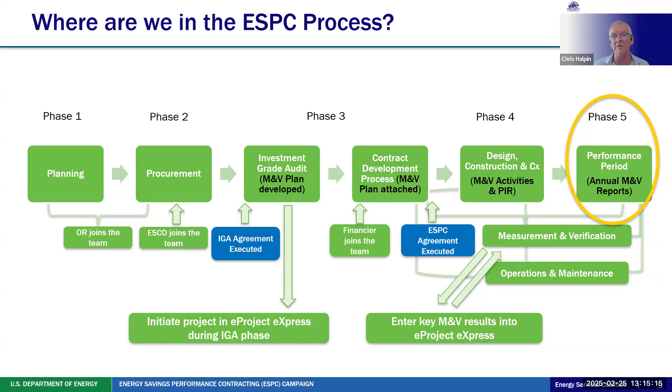Most of what we've talked about with M&V has already been covered in previous trainings and workshops. We're going to focus on this phase 5 performance period, but first a high-level review of the M&V process. The first time we talked about this in detail was in our workshop in October of 2024, reviewing investment grade audits, selecting M&V methods, determining key performance indicators, scheduling M&V activities, and the commissioning plan and activities.

One thing we went over in detail, commissioning and M&V are linked. Commissioning is making sure the equipment being put in is run through its paces and operating properly, the way it was intended. M&V is the energy savings that result from that equipment running properly and being maintained the way it was intended.

Owners reps, which you've heard me refer to multiple times - this is what I used to do for a living - can really help you out in these cases because this is a real specialty. M&V is one of these niches, and even if you have a really good facilities team operating your facilities, most of them have no background in M&V. So it's good to get some extra outside help for this.

This is a slide from Department of Energy's Performance Contracting National Resource Center, or PCNRC, Training Certificate Series. This is an 8-module series developed over the past few years. I was lucky enough to help them develop this, doing some quality assurance audit work for Department of Energy on it.

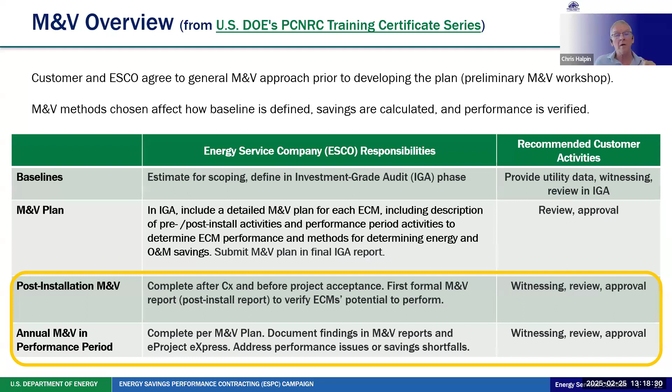So the first type of M&V report is the commissioning report. This is closely related - it's verifying the equipment, and these functional performance tests are there to make sure that how these things were designed is met during construction and implementation.

Then there's this post-installation, what we call the year 0 M&V report. It's right before acceptance. This is the last point we really have leverage with the ESCO to make sure this stuff is actually working and hopefully going to be delivering the savings to you. It's the last chance you have to really make sure these things are working well before it gets into the performance period.

Then the annual M&V report, and this is something done according to the contract. When you get this contract developed, the annual M&V report is described in detail in the M&V plan. There should be a template in that contract that shows how the ESCO needs to develop that report and how you should be reviewing it.

The first step that happens when an ESCO does this report is really verifying the savings were achieved. First, verifying that the equipment was installed the way it was supposed to. Then seeing if it's being operated and maintained the way it was supposed to. So if your folks on the owner side are supposed to be maintaining this equipment, the ESCO makes sure everybody's on the same page with that.

There are 4 different methods in the IPMVP. Two of them are based on retrofit isolation, basically taking lighting and motors. Because you can isolate those, you can count the fixtures in a room and go to the panel and actually put a meter on them, or put a meter on the disconnect for your motor and see how much electricity it's using, versus a whole facility. If you put a bunch of different measures in place, you can't just go to the meter and look at that, or individually at the panel. It has to be done as a whole building.

IPMVP gives you 2 ways to do each method. Option A, which we'll talk about in more detail later, is measuring a key parameter or two one time. Option B is all-parameter measurement over time. Whole facility is option C, where they basically take all the utility bills over however many years are in the baseline, and then take your utility bills going forward and use linear regression analysis, basically an algorithm, just like everyone knows about algorithms and AI now. That's been getting done for decades through option C. Option D is very similar, except using an energy simulation model that gets calibrated with the actual utility data over time.

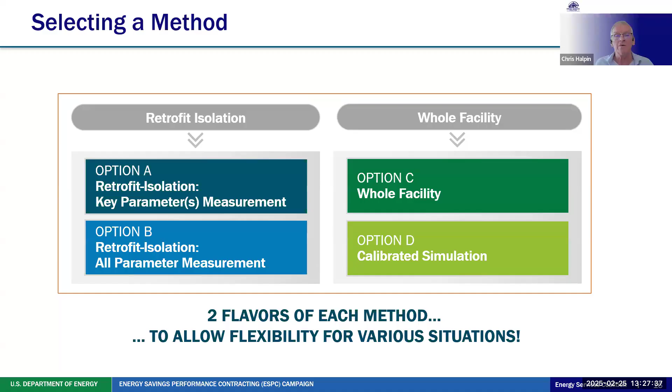So these 4 options each have pros and cons. Option A is used for short or long term. The usage, like hours for example, can be measured or agreed upon. The calculations are typically done in spreadsheets, and the cost is low. I developed a rating for this a while ago using sort of what you see on Yelp for the prices of restaurants, everyone understands it, 1 through 3 or 1 through 4 dollar signs. Typically it's used for lighting, motors, water, whatever.

Option B is where you're doing things like chiller replacements or solar. You're going to put several meters on it and measure it for quite a while, for weeks or months during the IGA, and maybe even permanently over time. Whole facility measurement, like I said, this is option C, where you're going to look at all your utility bills, electricity, power, and so on.

Can everybody hear me okay? Now I'm getting messages that it's choppy. If it's okay, let me know. Chris, your audio kind of slows down and speeds back up. I'm getting everything, but it is a little bit choppy, so just FYI. I don't know what's going on with this internet.

So option C, whole facility measurement, is primarily used in deep retrofits, like if you're doing 10 measures across your building or your whole complex. That's when option C is super, super helpful. It makes it a lot easier than trying to measure a bunch of individual energy conservation measures, or ECMs.

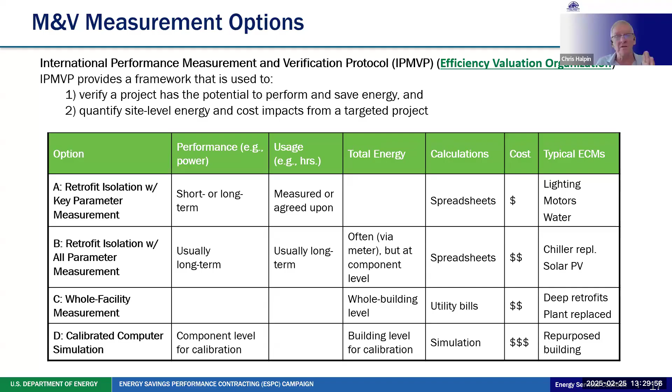If you're going to have a project or a measure inside your project where the savings aren't worth a lot, option A is great. Say you're going to replace water conservation measures, faucets and this and that. It's not a lot of money, and you're not going to spend a lot of money measuring it. Option A is great for that.

Or if the contractor isn't responsible for all the parameters affecting energy consumption, like weather, occupancy, and so on, option A is really good for that too. And if it's something you're able to assume with a level of certainty that's acceptable to everybody involved, option A makes the most sense as well.

And if ongoing measurement isn't required, like lighting is a great example. When you take out a 25-watt compact fluorescent lamp and put in a 10-watt LED, that LED is always going to draw 10 watts regardless of how old it is. The operating hours may vary over time, but if you can agree to them early on—say, this room operates 8 hours a day, 260 days a year, plus or minus 5%—that's close enough. Option A is just fine for that.

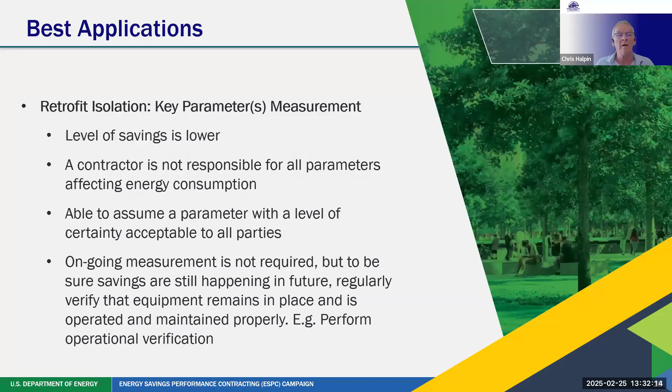But the loads can vary—cool summer, warm winter, cool winter, boiler, and so forth. The ESCO is responsible for the operations and the performance of that equipment. If they've designed and installed a chiller plant, for example, and the chiller has an efficiency rating that varies according to load, you want to measure that and see if it's actually performing as described in the contract, in the services agreement or the ESPC agreement.

Ongoing measurement really helps confirm this remains the case, like with the lighting, but it's even more important with something like a chiller plant or solar panels, and tracking the savings over time—because a lot of this equipment has many moving parts, like a control system or boilers, and depending on how the operation goes, that can really change over time.

I've seen situations with set points on whole systems where there's an event on a Saturday night, and the maintenance guy goes in and changes the schedule, then forgets to change it back. So every Saturday night, the atrium is set to 70 degrees when it could be at 80 degrees because nobody's there all weekend. So you want to make sure it gets corrected over time to keep a near-perfect application. That's why metering gets installed for a lot of this stuff.

So for the whole facility—that's if you're going to do very comprehensive measures saving 20, 30%, I've seen even as high as 40%—if you have a lot of energy conservation measures with potential interactive effects, like changing out the lighting, which reduces your HVAC load, and you put in new cooling systems and new controls, all of this is very difficult to calculate and keep track of without long-term evaluation.

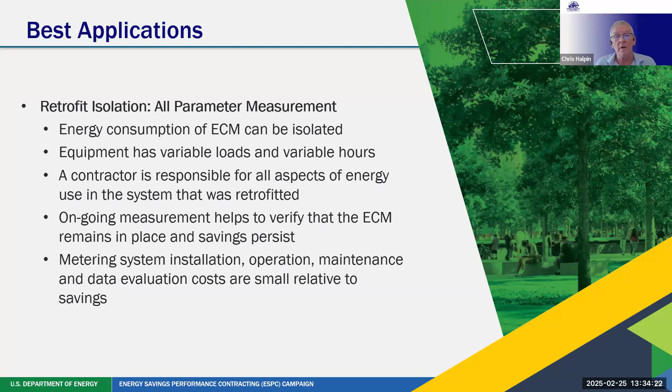Option C is a great way to do that. Also, if you have soft savings—like doing door sweeps and caulking on windows and that sort of thing—it's almost impossible to measure that directly. You just group that with option C and do a linear regression analysis, or have the ESCO do a linear regression analysis for it.

Then option D, like I said, is rarely used. It's an energy model-based option. We use something like a DOE model, Energy Plus, which is software out there. It's helpful for new construction.

And most people don't know, but depending on the state you're in, you can use ESPC for new construction, which is wonderful—you can peel out some of the mechanical and electrical stuff you probably don't have the money to pay for at the higher grade anyway, and performance-contract that piece of the project to fund it, using option D, because you don't have a baseline.

You don't know how much energy is going to be used by that building unless you model it and do a really quality model. And then you can calibrate actual energy data to the fact when it's built.

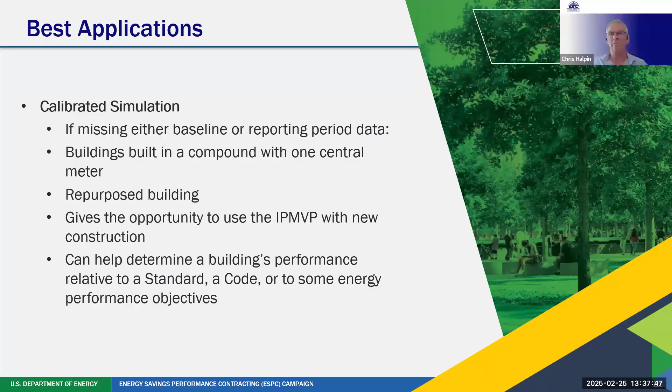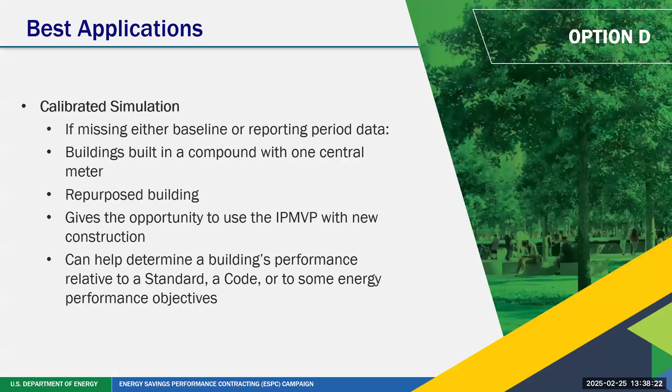Anyways, we used to see stipulated or deemed savings used a lot in industry, but it's really come a long way in the past years, getting used with these options A, B, C, D. Deemed or stipulated savings is not an option here - there's no option E in this protocol. That really just means an agreement that no real M&V is going to get done. It may be fine for minor things, especially for operating savings, but it's usually not a very good idea, especially these days when the technology is here to measure virtually anything that you're doing.

So one of the other best practices is making adjustments to the baseline based on post-retrofit conditions. There's routine ones and non-routine ones. Routine is like weather changes - every year you're going to take a look at the data. How hot was the summer? How did the chiller plant perform during the hot summer? And you reconcile that - it's not showing lots of extra savings, it just ran more, so there's more savings and bills went higher, and so on and so forth.

Non-routine adjustments are for things where something changed in the facility - for whatever reason, the facility got closed for the summer. This sometimes happens with schools, especially during the baseline period - that school was used for summer school, and not used for summer school during the performance period, or vice versa. All of a sudden you see this, and especially in a warm climate, it can make a huge difference.

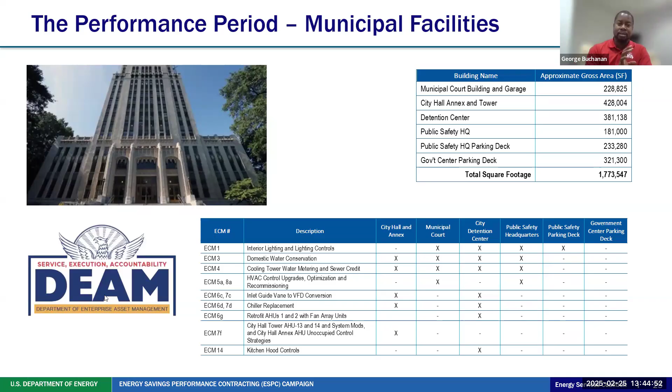As Chris mentioned, contact information will be up there, and of course the slide deck will be shared with attendees. So what I'll talk about now is the city of Atlanta, the capital city here in the Southeast, and I've focused on the large downtown buildings that they put into one of their ESPC portfolio sets of projects.

The reason I've included these—it all scales—is I want to talk about some examples of actual performance period as well as some M&V best practices, which is what we're here talking about this afternoon. So you can see here lots of square footage across these buildings, and along the bottom you see the ECMs that were included.

There are 9 projects here out of 22 discovered and presented by the ESCO, and these are the projects the city went with. You see them here across the matrix—different buildings got different ECMs.

A couple of things going on with this project: one, these are old buildings, they're large buildings. Some are connected and had shared utility meters, so baseline development was really a challenge for the ESCO to isolate what consumption belonged to what building.

Across this list of measures you see this blend. We hear the term low-hanging fruit—I don't think that's a good term, but that's just me. So a combination of those quick-payback, fund-generating measures, some measures that the city just needed to have done to maintain strong operation of the equipment in these buildings, and finally some capital-intensive measures—look at chiller replacements, for example, think of it that way.

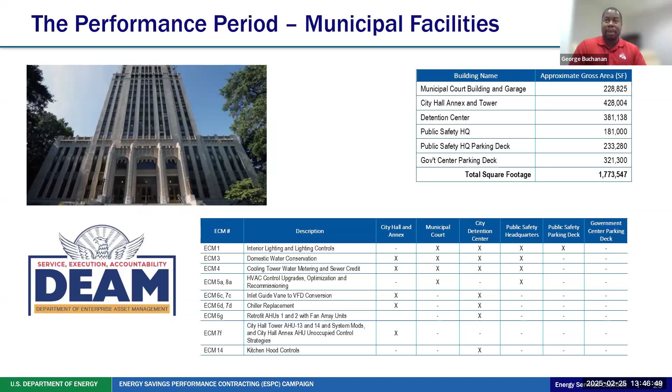So if you go on, here in the construction period, what did we find? We found that the ESCO presented—well, before they presented, you saw Chris was just speaking about IPMVP options.

You see most all of the project was done under option A. You may have situations where there are different M&V approaches done on a per-building basis, but that wasn't the case here. Almost everything was option A. In this case, lighting was the only ECM that was option B, but it was actually option A, right?

Chris was describing option B for us as continuous measurement of parameters over time. Well, the ESCO in this case had some short-term measurements on the burn hours for lighting, but they didn't do much in the construction period in terms of measuring burn hours. So it's really an option A. They label it option B, and it went forward.

So here, option B. The savings during the construction period, as reported by the ESCO, you see in these three tables along the bottom and on the right-hand side. These are your grouped energy conservation measures. You've got your lighting retrofit in the top right, the water conservation project in the bottom right, and of course, cooling tower submetering.

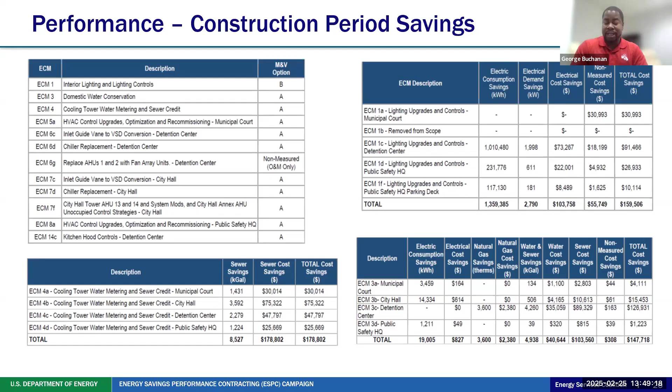Not going too deep into it here, but for example, you see in the bottom right in the water conservation, there is an impact to heating the hot water used in those buildings. So not only do you have water and sewer consumption savings, you're also going to have a gas savings as well. And then lighting, of course, is what it is. Now, again, these are the savings reported by the ESCO during the construction phase or construction period, and you see, taken together, these are some pretty impressive numbers.

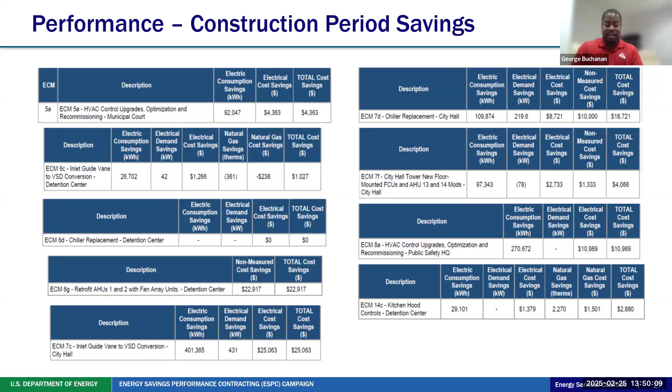Well, we found that we didn't necessarily agree with the reported construction period savings. In fact, we recommend the city recognize about half of what was reported.

So just a quick example, the cooling tower submetering project, right? The water utility says, okay, we'll give you that credit, but you need to prove 12 months of data to show that it's valid. Now, during the construction period, it was 12 months itself, so there weren't 12 months of available data for that reporting. The ESCO is very happy to report those numbers, but there was some verification that needed to happen, and that we were able to find here.

In addition, some of the mechanical measures on the slide with all the decentralized measures - there were ongoing equipment challenges and operating challenges with that equipment that meant savings, of course, weren't being achieved. The equipment's not doing what everybody thinks it's supposed to be doing. So here, just some best practices, on sort of a what-to-avoid concept here.

Just look into your baseline. That is, if you were to separate the investment grade energy audit into phases, for example, you've got your baseline development as that first phase of the IGA. So it's critically important to dig into everything that's being presented. During the guarantee period, where you see inconsistencies in reported use, this is a matter of data clarity - garbage in, garbage out. You need to share information with the ESCO, particularly on the O&M side, where some of the measures weren't performing as they were intended to.

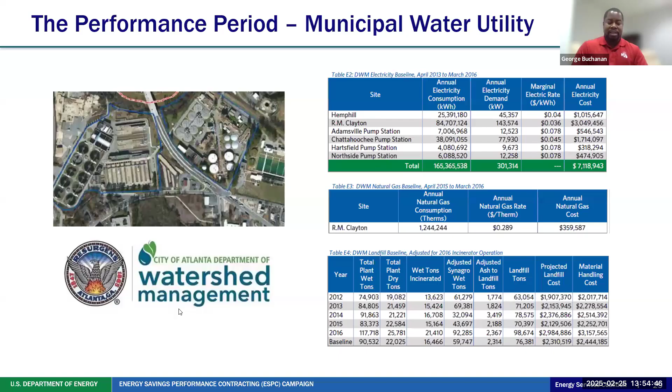Going on to the next slide, after the ECMs were implemented, this involved the installation of a sludge drying plant—you see it there under construction—where now all of this wet tons of sludge is going to be dried and we create these little pellets, dramatically reducing the cost of landfilling the material. This was a pretty big project, about $77 million between the ultraviolet disinfection system and this new sludge drying plant. UV disinfection is just part of the process in wastewater treatment, actually the last step before dumping the effluent back into a local water source or whatnot.

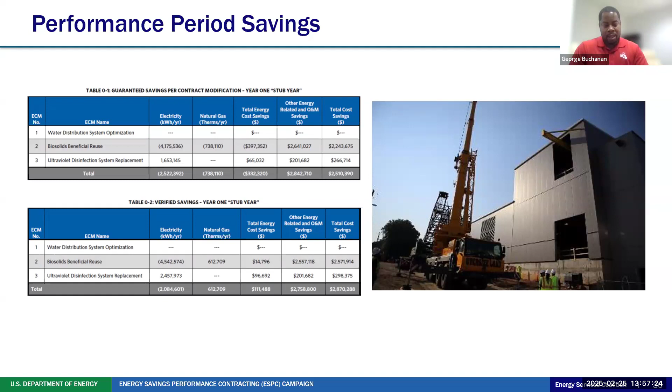So what did we find? The ESCO had to make a lot of assumptions. The UV system—yeah, they were able to calculate savings and it was within reason, but they had to go back to a lot of baseline data because the city wasn't necessarily timely handing over information. So as you are preparing your contract, your project, make sure you've got the means to continuously transmit data, and that it's not going to get lost in the shuffle.

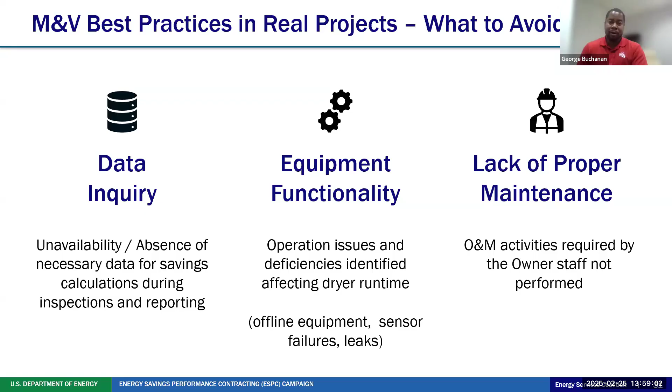On the equipment functionality side, particularly with the sludge drying plant, we saw operational issues and deficiencies. The ESCO creates the condition for you to achieve savings, to operate under this new, more efficient, more beneficial standard practice. It's up to you to maintain the equipment as prescribed, to operate the equipment as prescribed, do your PMs and so on. Here we see lack of proper maintenance, where systems are falling in and out of operation. The way the contracts are written, the ESCO is going to be able to say, look, I've satisfied the conditions of my guarantee—the reason this isn't performing is because you're not doing your part. And that stuff's going to be spelled out in the contract.

Just like I was mentioning, do your part to maintain the equipment. Make sure that any repairs, replacements, PMs, and all that stuff are done.

This is a non-exhaustive list. There are plenty of other best practices that I know the DOE resources have available. It was mentioned eProject Builder is a great tool for building up your baselines, being able to report those savings, and keep all the stakeholders aware of everything that's going on. So hopefully that provides a little bit of context on some best practices.

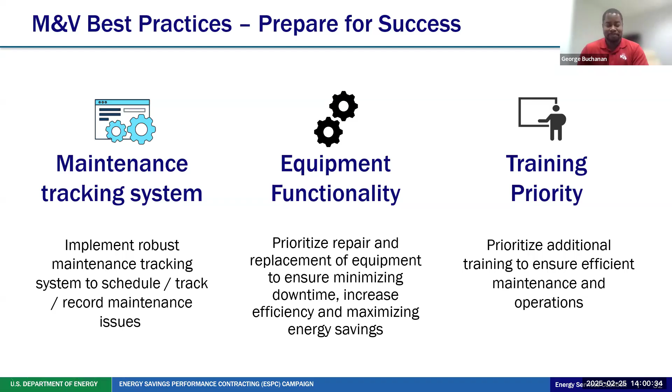Great, thank you George, and I'm going to advance to wrap up here. And Chris, are you back with us? I am back, can you hear me? Perfectly, yes. All right, it's a momentary lapse of reason. Here we go, all good now.

All right, so I put together this list of questions. Do we have any questions from anybody in the audience so far? Not seeing any, so maybe we'll just run through these as issues that they should consider.

No problem. And has Tracy joined? I saw that he got back, but I don't know if he's actually joined. Don't see Tracy on. That doesn't look like it.

Okay, so one of the ones I'd put up here is, should I hire an owner's rep to review the annual M&V report submitted by the ESCO? Back during the beginning of me making you drink from a fire hose at the start of the presentation, I said that yes, an owner's rep can really help, right? And George mentioned it as well, they can really help you with both the post-installation M&V plan during project development, but also that post-installation M&V report, and then these annual M&V reports, to make sure that everything the ESCO is saying in those reports makes sense and is accurate and reasonable, right? And it really helps you because you're going to be making these payments every year to the financier for the term of the contract. You want to try to make sure that the savings are there, right? Because when you actually go to get payments made and get this deal set up, typically your budget people are taking money out of your utility budget and putting it into the pay-off-the-note line item in the budget, right? So you want to try to make sure that's all working.